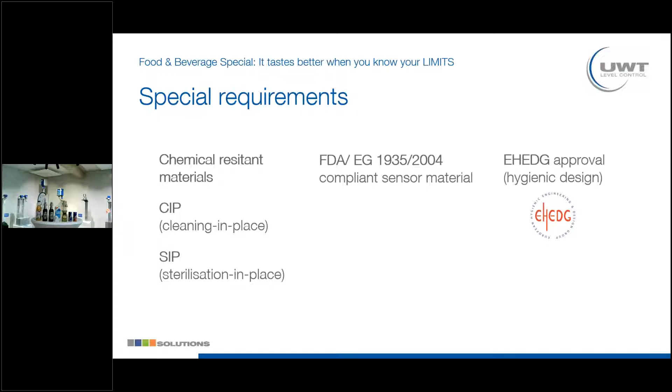What we have prepared here is RF3 devices. So here you see a normal RF3, and here we have an EHEDG unit. What you see exactly here is that you have no edges - everything is smooth, everything is polished. And what's really special here is the process connection - it's almost a flat surface, so no material can stick in, which is really important for the cleaning itself. And what EHEDG also has is that all EHEDG units are marked with an EHEDG sticker.

The next one is a rotary paddle. So here is the EHEDG rotary paddle - you see it's one part, so the extension, the prolongation, comes together with the vane, and we do not have any splints at all. We also have a food grade material sealing, and also a food grade approved fat here.

If you compare this with a normal RN, you see here that we have a splint, and also the surface is not as clean as on the other one. So you see exactly the difference between an EHEDG unit and a non-EHEDG unit.

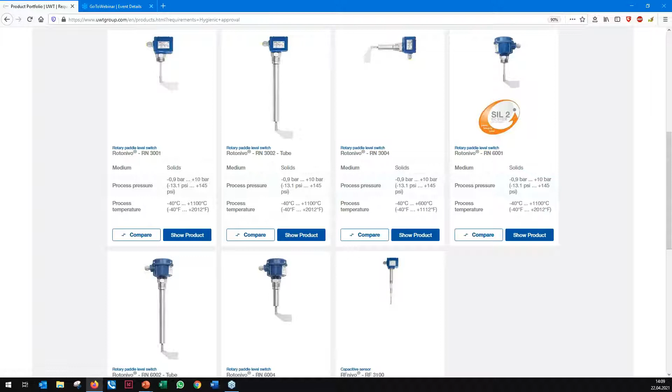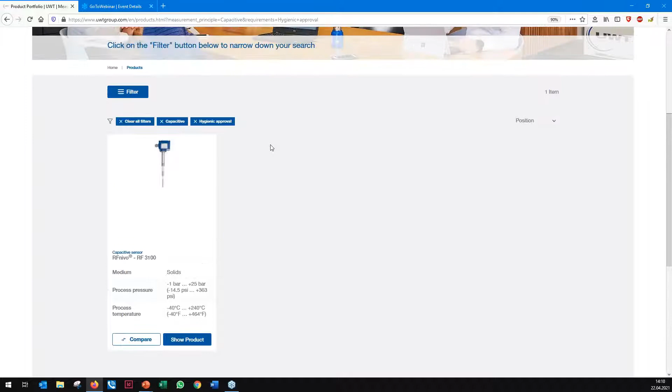For example, different Rotonivos, and also the RF sensor. Now you can go on, whether you are interested in the technology - which technologies come with all the EHEDG approvals? Here we can see the measurement principle. We selected hygienic approvals, and now we can see we have two measurement principles that can be used in hygienic applications: the rotary paddle and also the capacitive principle. For the capacitive principle, you can now find the RFnivo RF 3100. So if you're searching for an EHEDG sensor, pretty simple and quick, with good guidance of our product finder, you can find the suitable sensor here, for example the RF 3100.

So this was the first requirement. The second requirement Julian was talking about - we can here delete all the filters we set up. The second requirement was the FDA, so that the wetted parts are compliant with food grade. Again, same procedure: click on products and all our products will occur. Then use the filter option, scroll down, again requirements, and here you will find the option suitable for food. If you click on this attribute, 30 products will be shown that can be used for the food industry and also for the beverage industry.

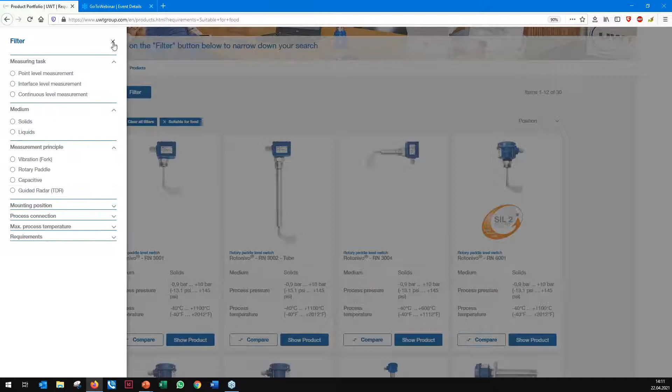So when it comes to FDA compliant sensor material - here again, if you want more information on which measurement principles you can use with an FDA sensor: vibration, rotary paddle, capacitive, and also the TDR sensor all have the FDA approval.

The third requirement I want to talk about now is the chemical resistance. This is a little more difficult to really implement in a filter, so it's not possible, because there are many different materials with different properties, and mediums with different properties, that can be aggressive to different materials. So here we cannot set a filter, but maybe we're again talking about the RF sensor because it has the EHEDG approval and also FDA conformed materials.

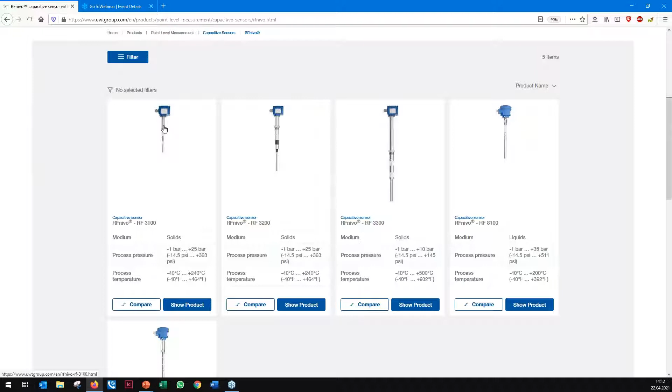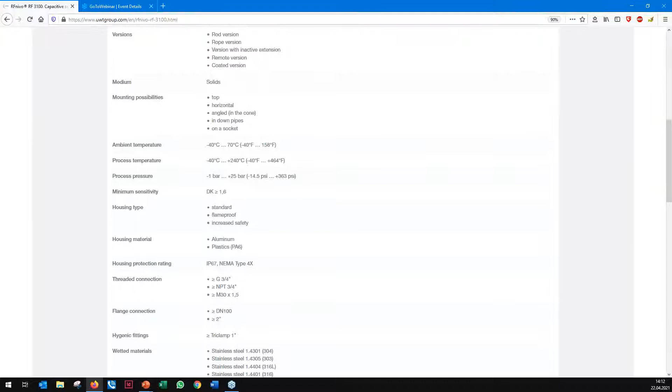When we click on this sensor, you will be guided, navigated to the product detail page with many more informations about our sensor. For example, we have this tab here with the technical data. If you click on it and scroll down a little, you will find the wetted materials here - the materials that come into contact with the medium. For example, stainless steel, and different plastic materials like PPS, FKM, FFKM, and also PFA.

With this information, you can then use a chemical resistance list and compare the medium you want to measure with the material used as wetted parts for the sensors, and then check whether they are resistant or not.

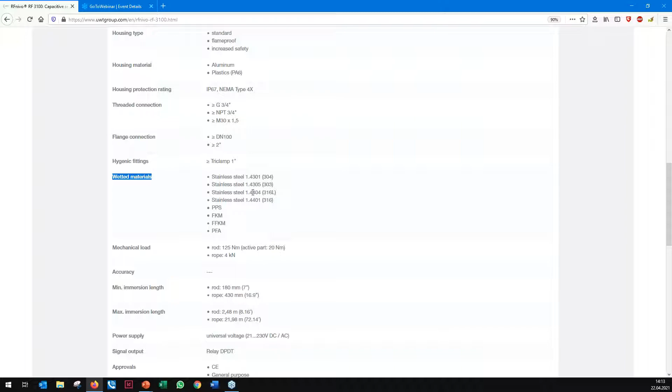This is what our web shop really helps you with, if you know the requirements and know what you're searching for. You can configure the product quite easily and fast. It's really simple and intuitive. If one combination is not possible, you will get an information, so you are guided along the whole process from knowing the requirements to choosing the right sensor. Pretty helpful feature, and we hope you enjoy it as much as we do.

We want to motivate you to use it during your daily business because it's a big benefit, and we are very proud of our new web shop. So this was the web shop presentation, and now we will go on with some

applications we already solved in the industry, and we will switch to PowerPoint.

Our new web shop is a great help for everybody. If some combinations are not possible, it shows automatically how you can build your own unit. As you know, we don't have one unit on stock, everything is done customized, every rotary paddle, and this is really a huge benefit we should use in our daily business. So now we go on with a PowerPoint presentation.

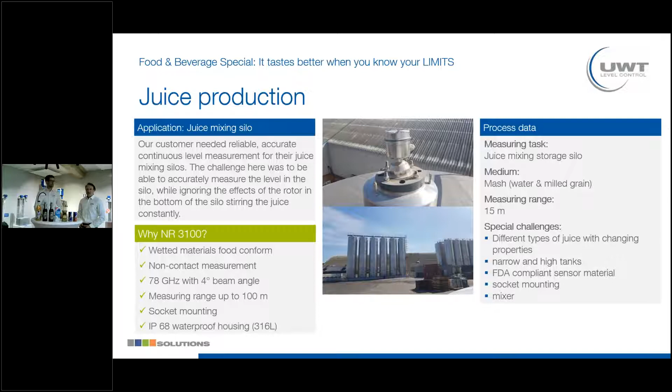The second success story we want to talk about is the Vibranivo. We had an instant coffee production with different products. The special challenge with this product was that they were quite sticky, so they tend to build up. It was a small container, we had a constant flow of the material, and the material was constantly changing.

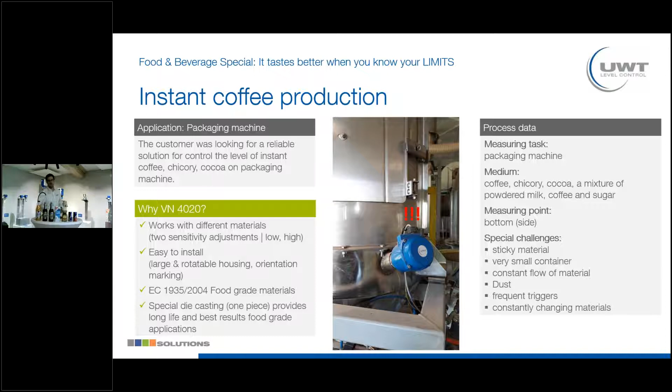But what does the exclamation mark say here, Nicholas? I'm not seeing so much information here. Can we talk about this in detail? Maybe you can show me. I'm not sure if this is possible right now, but can we? Of course, I will hand over. Yeah, well, what is this? What does it say, the installation point, and what are we talking about here?

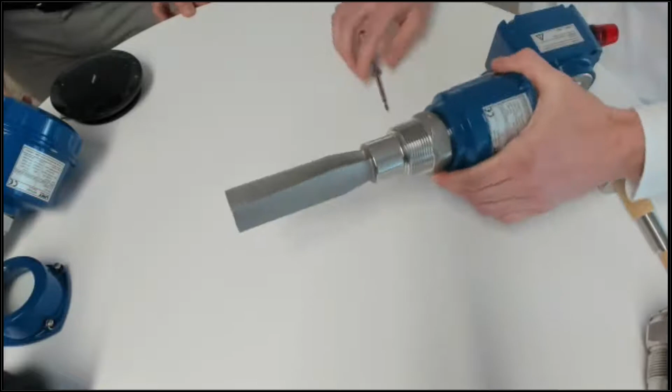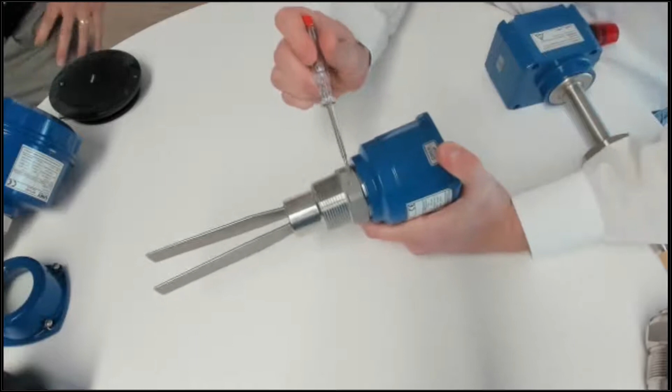When we look at our vibrating fork, the VN 4020, you can see we have this orientation mark right up here. This is important for the mounting of the sensor, that it is mounted properly. This should always show up, so that we get this small surface here of the forks. If you mount it like this, you will have a big surface where material can just lay on. Then, okay, now I get it.

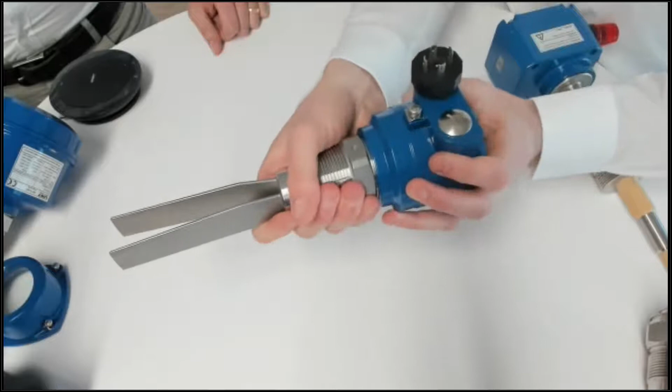Okay, it works properly enough. What you can also do, and this is what the exclamation mark shows you, is that normally the cable glands should not show up, but should show down. So when the sensor is mounted, you can easily turn the housing left or rightwards, and then when it's installed, you turn the housing so the cable glands show to the bottom.

So just to avoid any water or dirt moving inside the sensor - some pretty helpful features. What is also important to know is that we have a die cast here, a die cast fork connected to the process connection. So hygienic design, also with the stainless steel here.

So this is a pretty good sensor for those applications, and also a good solution for instant coffee production. What you can also see here, we have the red area with some dip switches. Here you can choose whether it's a low or a high sensitivity. For example, when there is material that tends to be sticky and stick on the forks, you should choose the low sensitivity option, because then it does not react as quickly as with high sensitivity - a little bit of material can stick on the probe as well. So you can choose this with the dip switches, A and B position, always depending on the application and the material, and whether it is sticky or not.

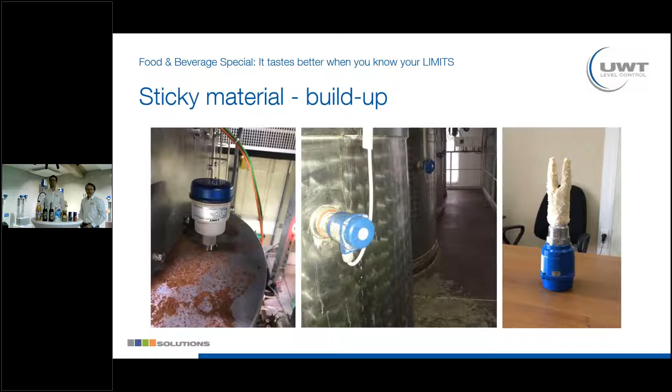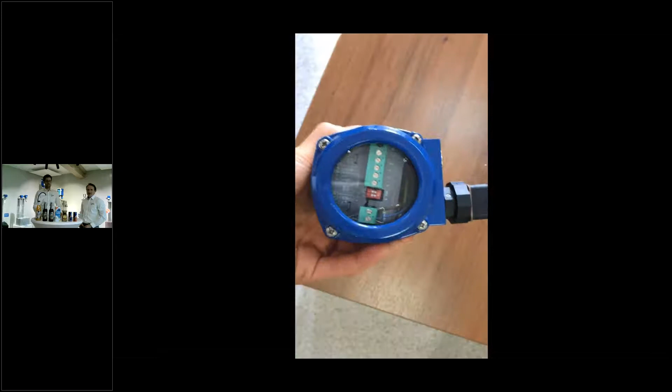Nice solution. So here we also have a video for you on the right side where you can see a lot of material sticking on the forks. And what you can see here - even if there is so much material on it and we press it to the table, it reacts. This is where the red LED was switching on and off, and you see it even works with such thick build-up around the forks.

Although we do not recommend such big build-up with vibrating forks, because it's critical that the sensor always has a good signal, so we do not recommend using it with such big build-up. What we do recommend here is the CN 7000. This works perfectly with build-up around the probe - a lot of material can stick there and it just ignores the build-up. So this might be a solution then.

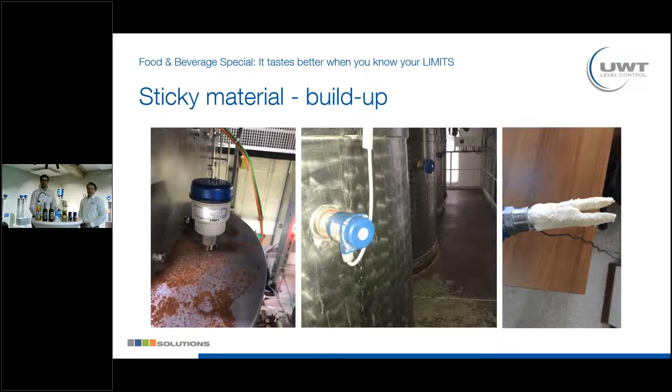Although we're talking about a liquid sensor, here you can also see some pictures from this packaging machine. You can imagine that we have a lot of material flow here inside this machine. On the left side you can see the sensor is now mounted properly, so the cable glands point to the bottom of the packaging machine. And here it also worked perfectly with the Vibra.

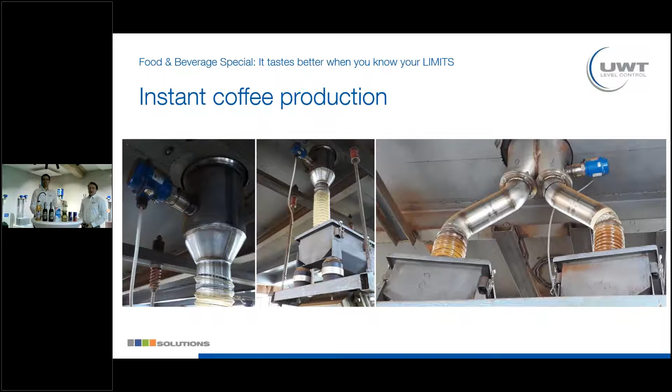But Nicholas, active shield technology, inverse frequency, and then I know that CN7 also has tip sensitivity. Can you explain something more, or how can I improve my knowledge here? Because these are not common things everybody knows. Do you have any recommendations for this?

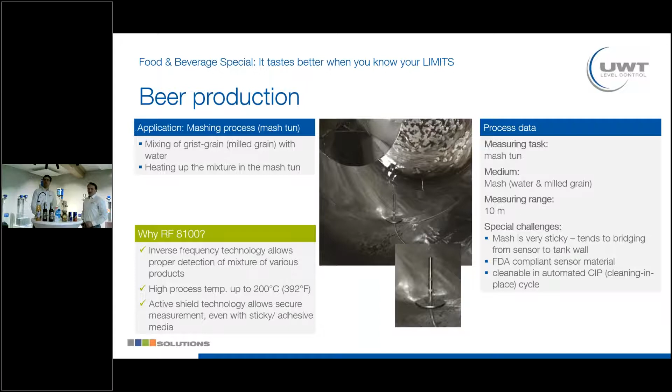And last, for my part, another application also in the beer industry - we had a very popular brewery of our region, the Allgäu Brewery, using the Vibranivo 4020. This is what they are producing, and our sensor was part of the production process of this beer, so we're a little bit proud here.

Special features of the Vibranivo include die casting, which provides a long lifetime. It's easy to install, as I just showed with the orientation marking and the rotatable housing. The forks are a little shorter, so we don't have as much mechanical influence on the forks, which is also good for long lifetime. And the VN4020 has great value for money - a really good product for this industry and these applications.

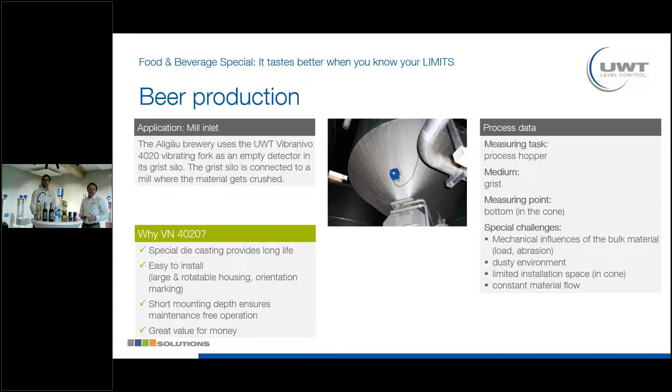Why did we use an RN 3000 here? There was easy mounting from the side position, and of course a long lifetime of UWT rotary paddles and all our other units. We also have an individual design - as I said before, every unit is built customized. We're not keeping one unit on stock; everything is built to your needs.

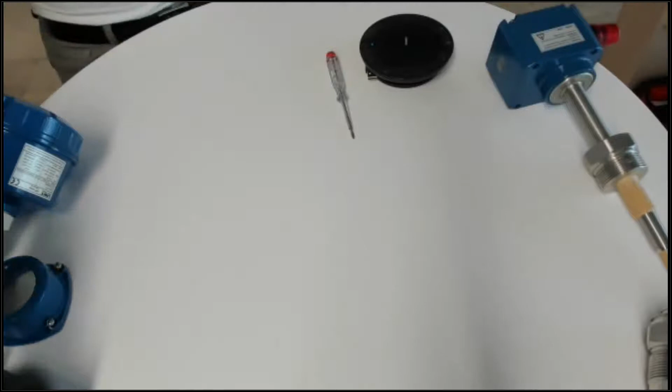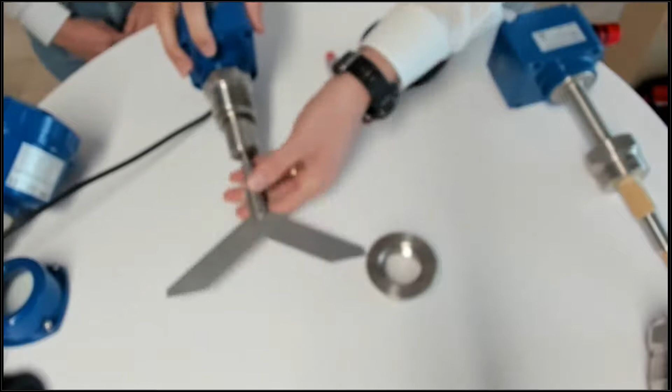We have here a small process connection and a double-hinged vane. The huge advantage is that we can squeeze the vane together to fit through the small process connection, and it will automatically pop up.

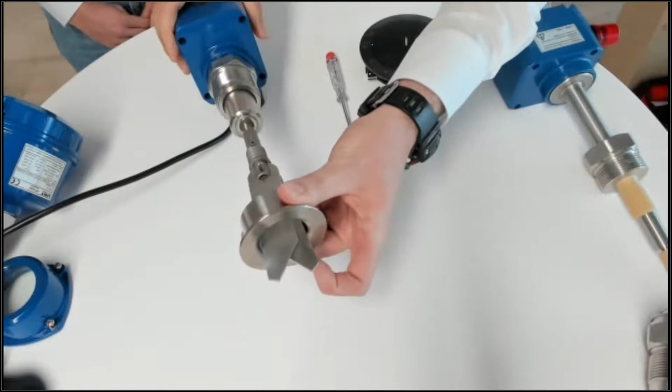Oh great, that's nice, isn't it? And as we talked about before, we also have cleaning in place, so sometimes we need to remove the units. What we can easily do is squeeze them together and easily remove the unit to clean the silo or process hopper itself.

Why did we use this big vane? Because we have a low density material, and we have three ways to adjust the sensitivity. We can use a bigger vane - the bigger the vane, the lower the sensitivity needed for the material. We can also set 5 revolutions per minute for a faster reaction time. And we can also adjust a spring on the PCB, giving us three ways to adjust each rotary paddle.

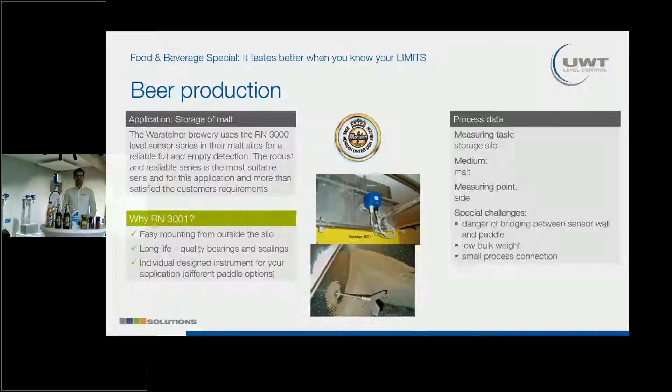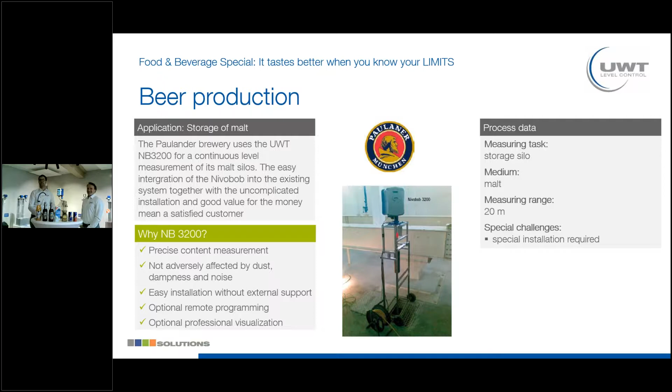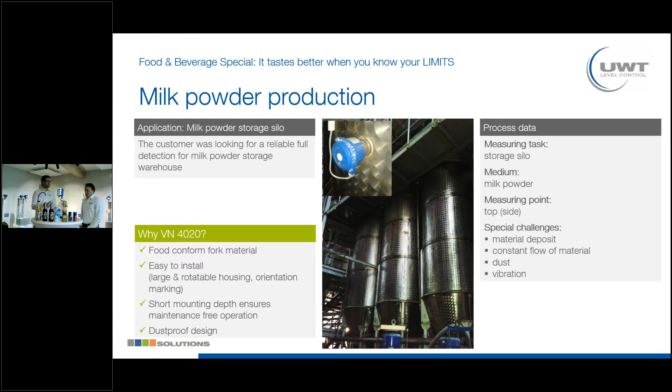So, Nicholas, we talked about many applications and learned so many nice things we can use in our daily business to convince customers how great UWT's devices are. We are the number one rotary paddle market leader, because the lifetime is really high, the quality is perfect, and there's no maintenance at all.

And yeah, now I'm getting really thirsty—we talked about beer, and we're very proud that UWT's units are used in the Allgäu Brauhaus brewery. I'm pretty sure it tastes even better knowing that UWT devices are used in their production. Of course—oh, hopefully it wasn't too loud.